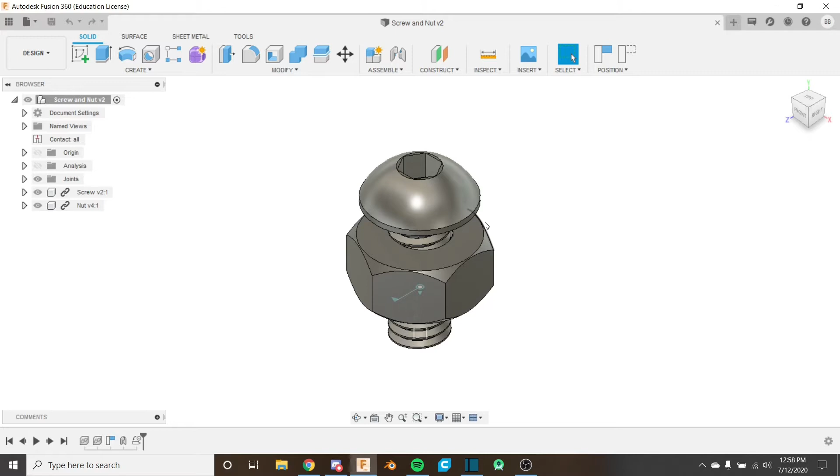So I want to create a table for our nut and our screw to sit on, because I don't want them floating in the air. So the first thing I'm going to do is align the screw and the nut properly. Right now it's just kind of balancing on its point here. This is the top, this is the bottom. So I want to turn it on its side and make one of these flat nut faces level with the ground.

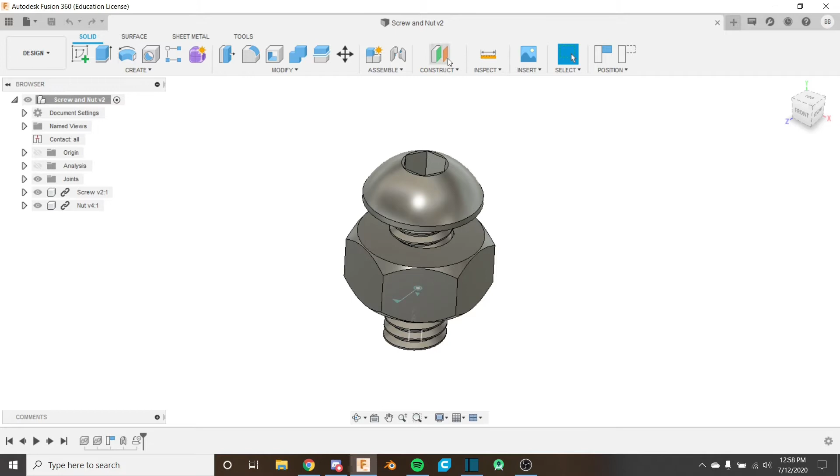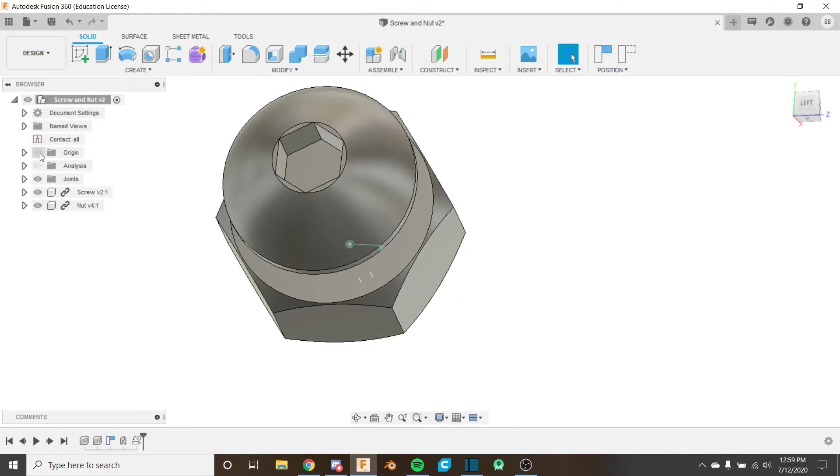So I'm going to do a move copy like this, and rotate it 90 degrees so it's sitting on its side. Then I'm going to look from here and rotate it until it's flat. And just like that, I think that's flat. We can double check by doing a measure between here and the origin plane like this, and we can see that the angle is 0 degrees.

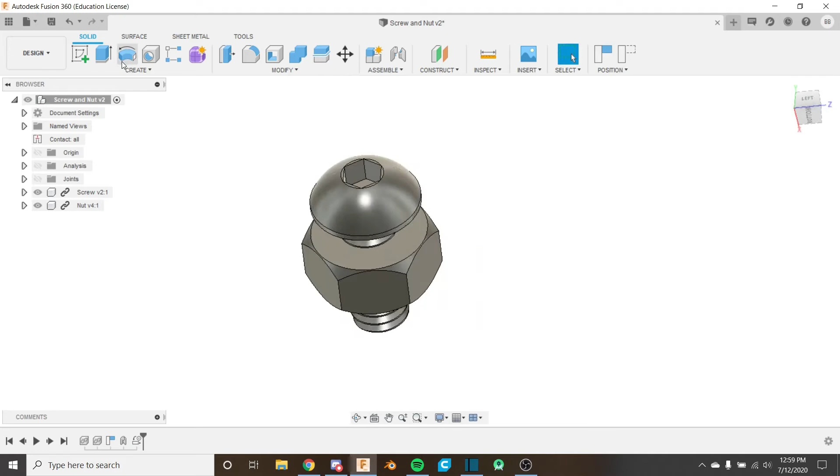So it's flat there. The next thing that I want to do is create the table for our screw and our nut to sit on. So I'm going to create a sketch on this bottom face here, capture position, and create a center rectangle for our table, just like this. It's going to be a pretty small table, but a table's a lot bigger than a screw. Something like that's fine.

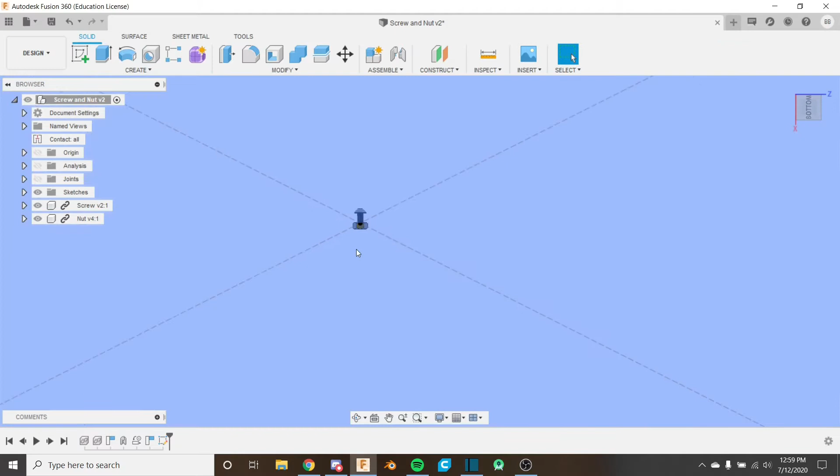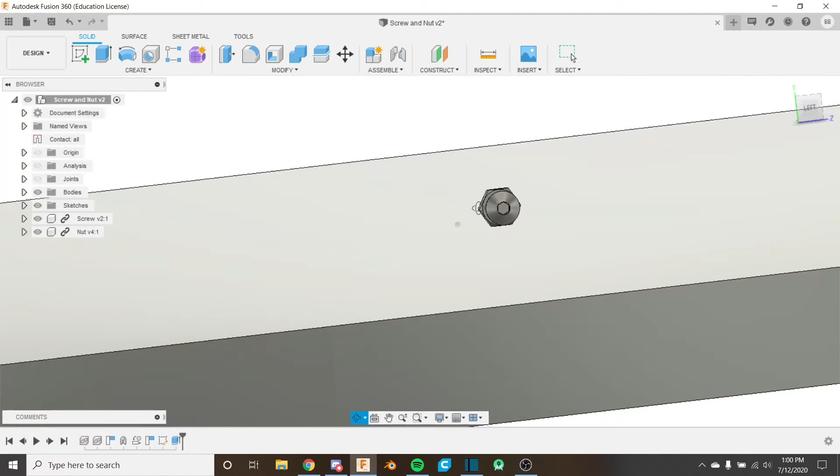And then I'm going to finish the sketch, hit E for extrude, select this, and make sure to select this face, otherwise it'll leave a hole. We're going to go ahead and bring it down 1 inch. Even though this document is in millimeters, I can put in 1 inch and it'll calculate that. And we have a new body. This is our table. So now we have some issues with this that we need to sort out.

First, the screw head is smaller than the size of the nut, so we need to figure out the angle where it's going to be resting. I think the screw head is heavy enough that it's going to make it rest at an angle.

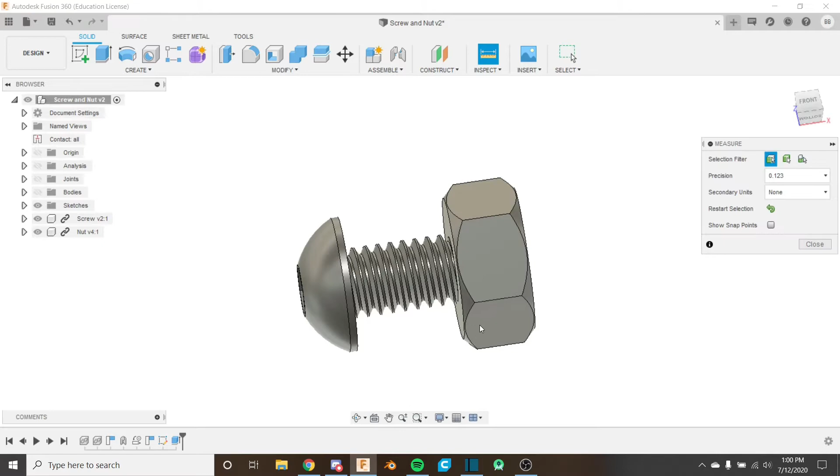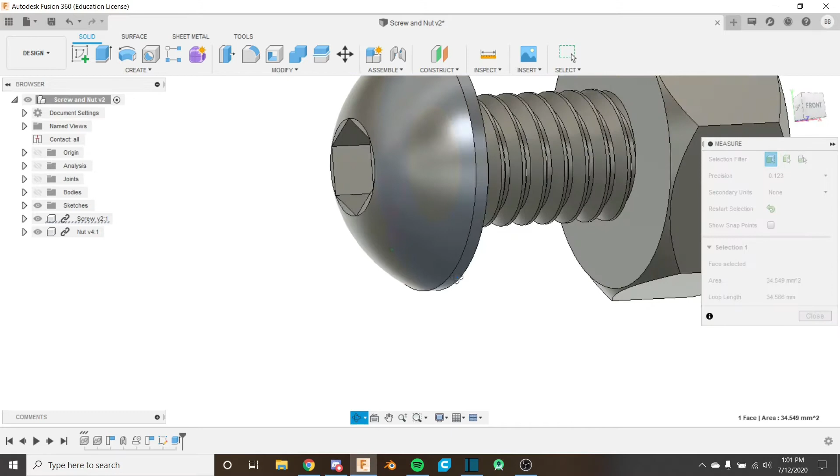So I'm going to calculate the height difference between the two by hiding our table and measuring from here to here. It tells us the distance is 0.245 millimeters. So I'm going to write that down, and we're just going to do some basic trigonometry with this. Then I need to know the distance between the faces, like this, and it says it's 6 millimeters.

So I'm going to use the inverse tangent trigonometry function to calculate this. If I do inverse tangent of 0.245 divided by 6, I get an angle of 2.34 degrees. This is going to be the angle that we need to rotate the screw.

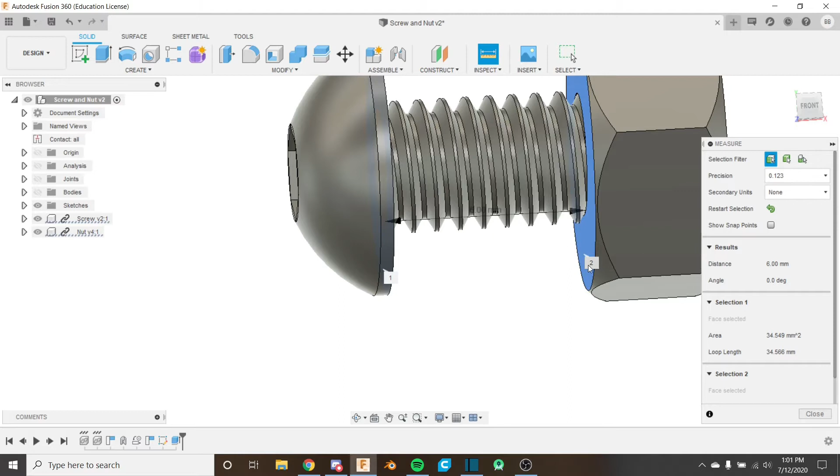Now, if I try to rotate it now, you'd notice it kind of stops me. I can't move it, and that's because we have contact sets turned on, and this is going to stop bodies from interfering with each other. So if I turn this off by clicking no contact, we'll bring it back later once we have everything in position.

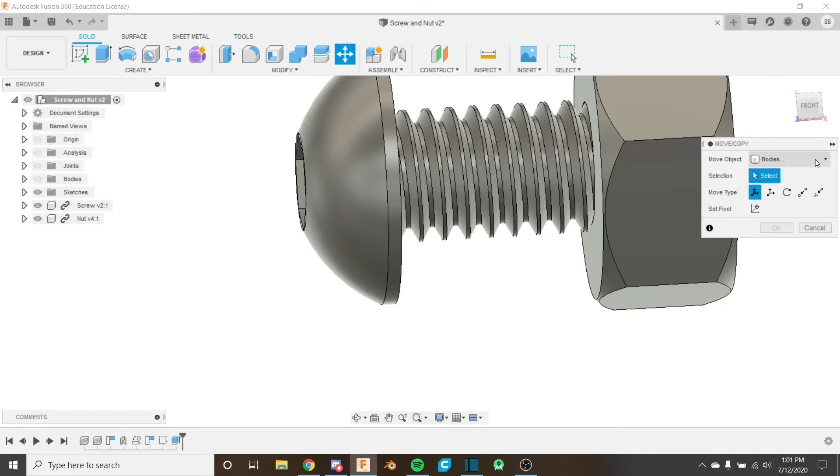Now it will let me move things, so they interfere. I'm going to go ahead and change this angle to our 2.34 calculated angle, just like that. Click OK, and now our screw is resting at the angle that we specified.

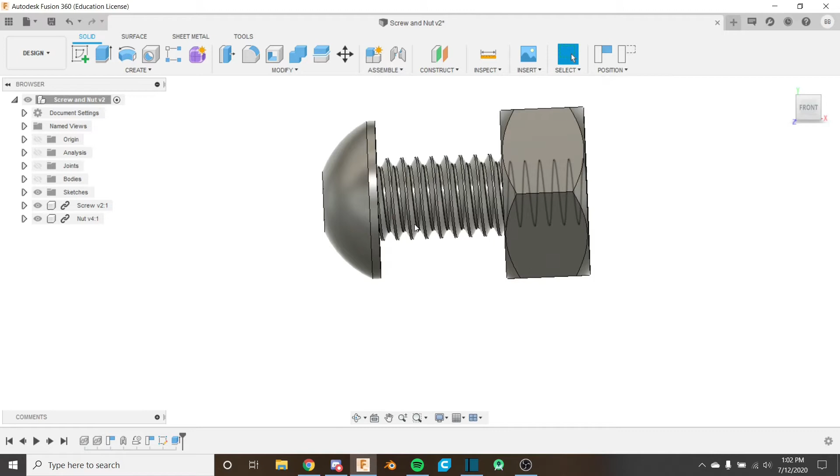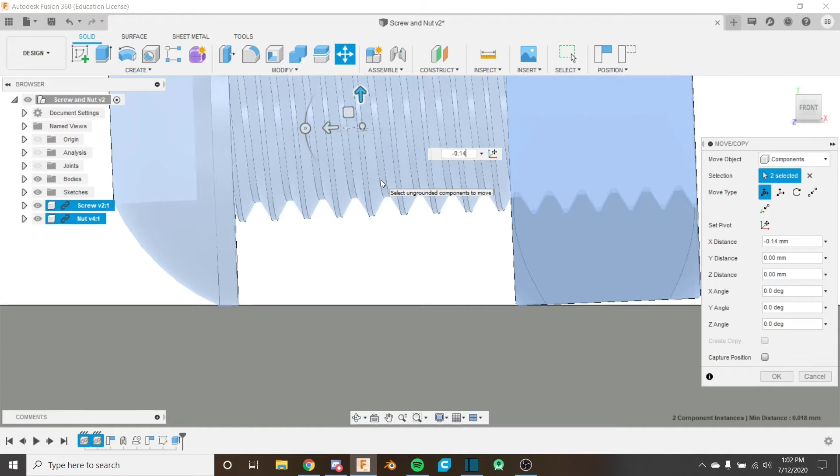So the next thing that we have to do is position it so it's level with the table. Right now we can see it's sort of floating above the table. This doesn't have to be perfect. I'm just going to bring it down a little bit until it's not floating anymore. It really doesn't have to be perfect. Maybe something like negative 0.14 is working for me.

That's pretty close. Just like that, we have our screw and our nut resting on the table realistically. Just like that is perfect.

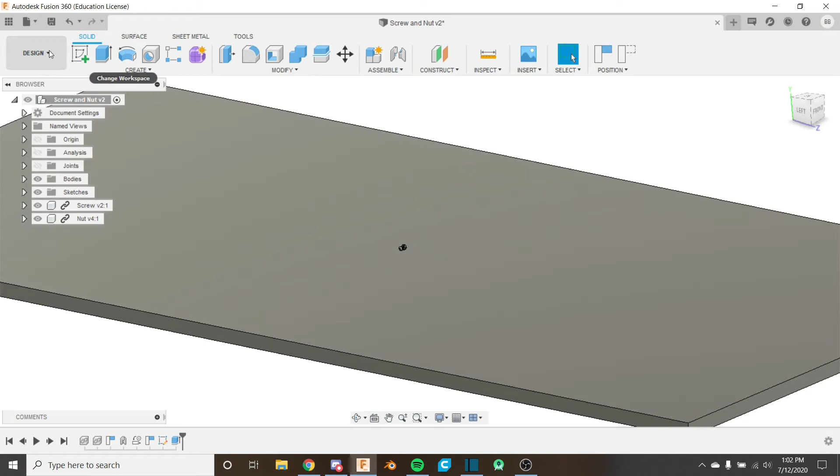So I'm going to go ahead and hop into the render workspace now, and now we can do our rendering settings. The first thing I want to do is apply some realistic materials to everything.

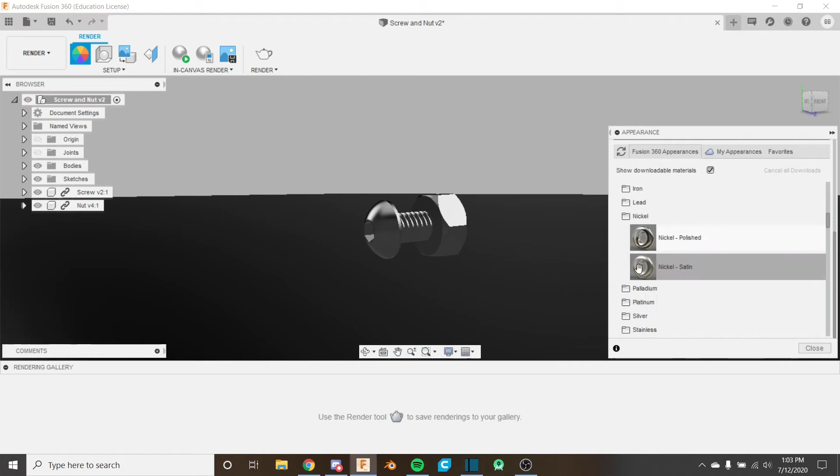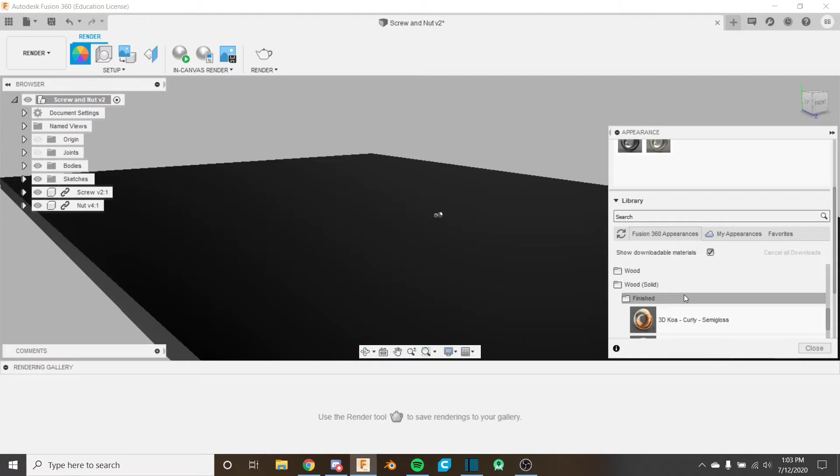It looks great. Now for our table, I think a wood table is what we want. I feel like most workshop tables are wood, so I'm going to choose sort of like an unfinished wood. Fusion 360 has some woods, but they're really all super perfect, so I'm just going to choose something that looks the best.

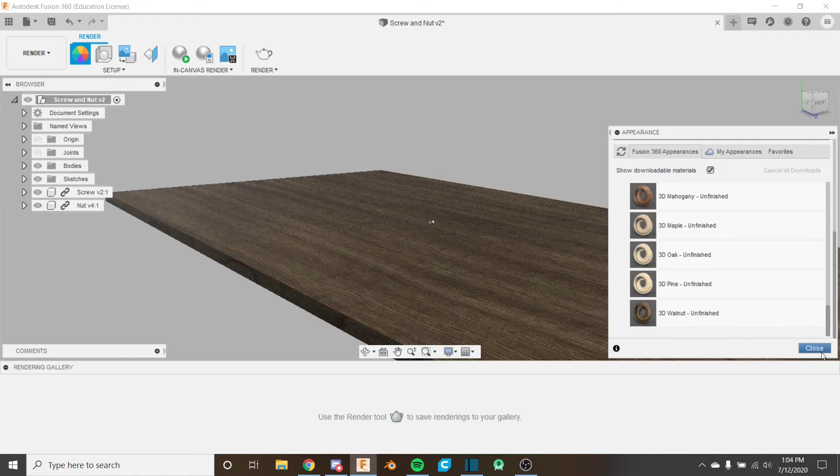Maybe mahogany, or maybe walnut. Yeah, I think walnut's good. I think I'm going to go with walnut. And we can zoom in and see how that looks.

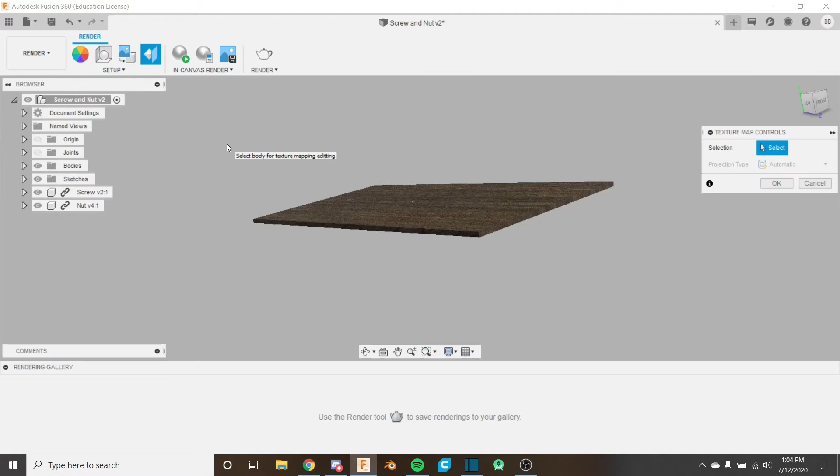Okay, so now we have our appearances set, but we can see that our wood grain is completely straight, completely squared away here. So what I'm going to do is go into the texture map controls.

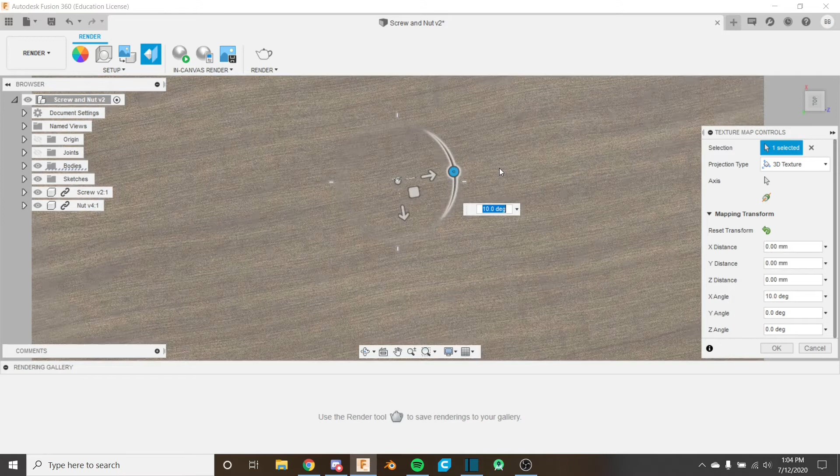I'm going to select our texture, which is our wood texture here, and I'm just going to maybe rotate it somewhat. I don't know, let's see. The thing is, on a table, the wood grain would probably be squared away on a rectangular table like this.

But when we're going to be rendering it, we're going to be zoomed in, and you're not going to really be able to see the end of the table. So I think it gives it a good effect if it's not squared away. I'm just going to do something like that, and we can just move this around until we get a wood grain that appeals to you.

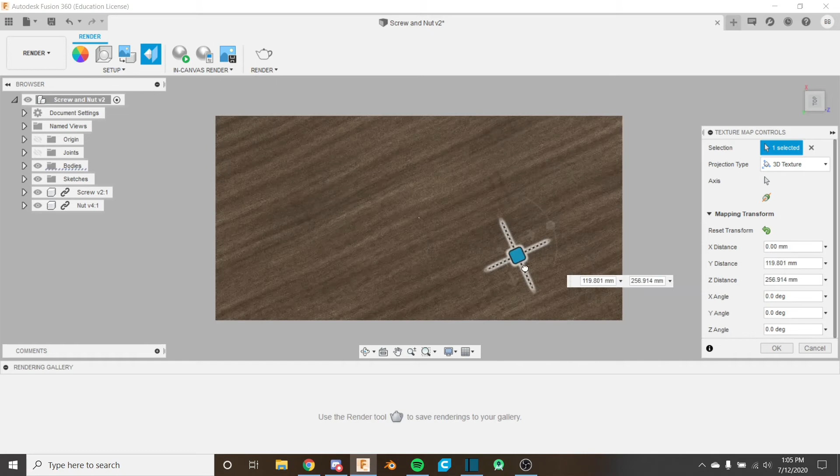I think I like it over here with the more darker sort of stuff. Just like that, I'm going to click OK. And now we have our wood texture completely set up.

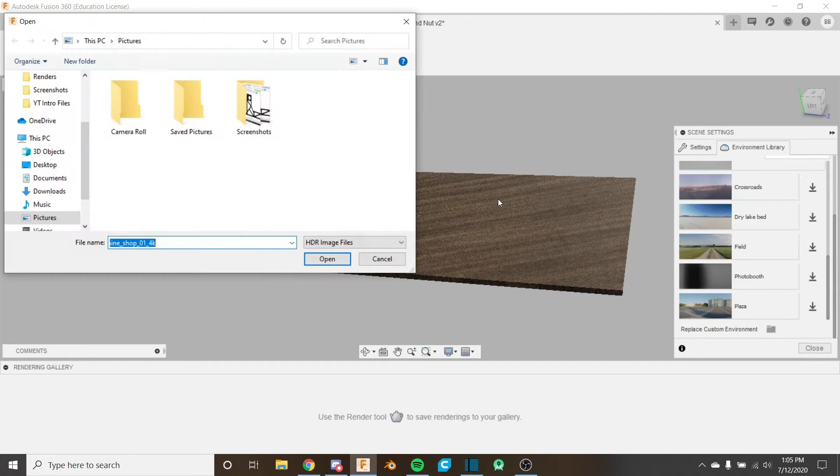The first thing I want to do is get an HDRI in here. I like that HDRI with the workshop, the machine shop HDRI. The aerodynamics workshop is really popular, a lot of people do renders in that one.

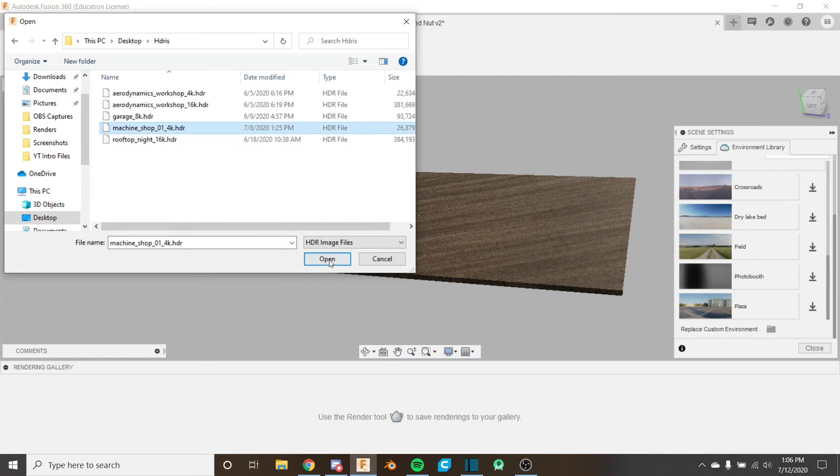And in the settings, I'm going to go ahead. Right now it's just gray. We're going to put this on environment so we can see the HDRI, just like that.

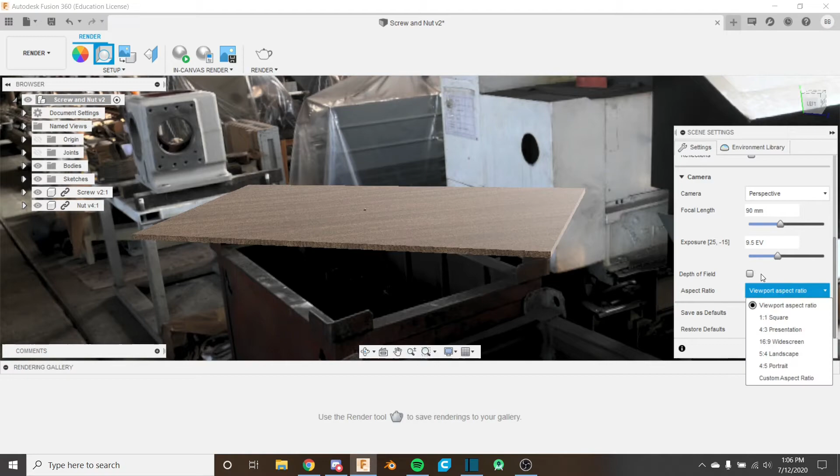Let's go through the settings. The first thing I want to do is change this to 16 by 9, so we know how much space we're working with, just like this.

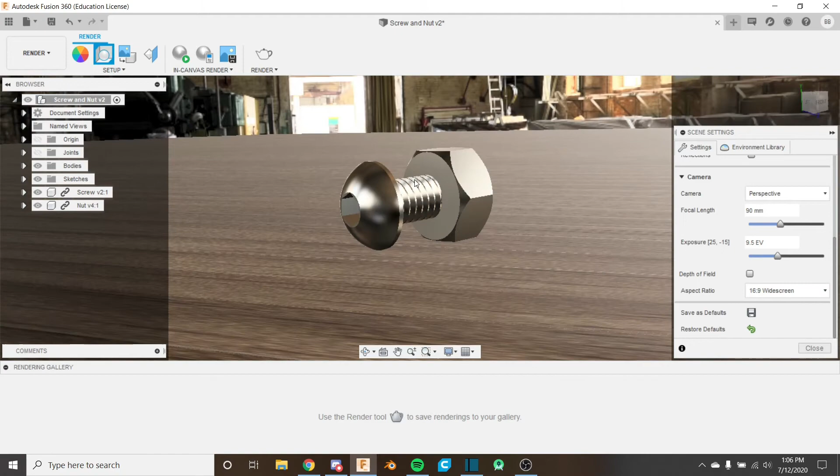And then I'm going to position my camera so we can get sort of like the look we're going for. I want it like a really low angle like this, where you can see the background really close to the screw. And remember that the camera doesn't have to be exactly flat, because that's not realistic. Maybe something like this is good.

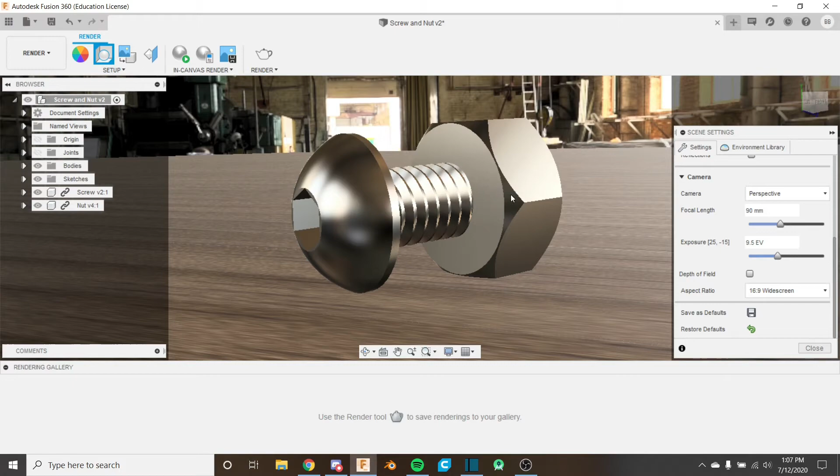And there, now we can change some things. So I want to actually save this view. If I go back to the design workspace and change some stuff, I want to always come back to this view. This is going to be my render view. How do I save this view?

In the named views section, we have the top, front, right, and home views. I want to create a new one, so I'm going to right click on named view, do new named view, and double click here so we can change the name to render. This is going to be our rendered view. So if I go away and then come back to the rendered view, it's going to be like that. Perfect. So we can look around at things and always come back to this view.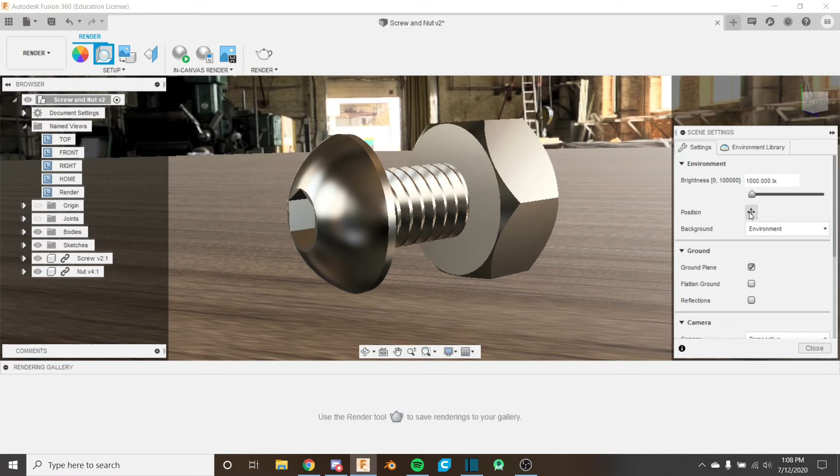Okay, so let's get into the settings here. The first thing I'm going to change is the position of the HDRI so we have the lighting how we want it. I'm just going to rotate it around, look at what's available and see which lighting I like. I want some nice reflections in the screw head, but I also don't want it to be too dark.

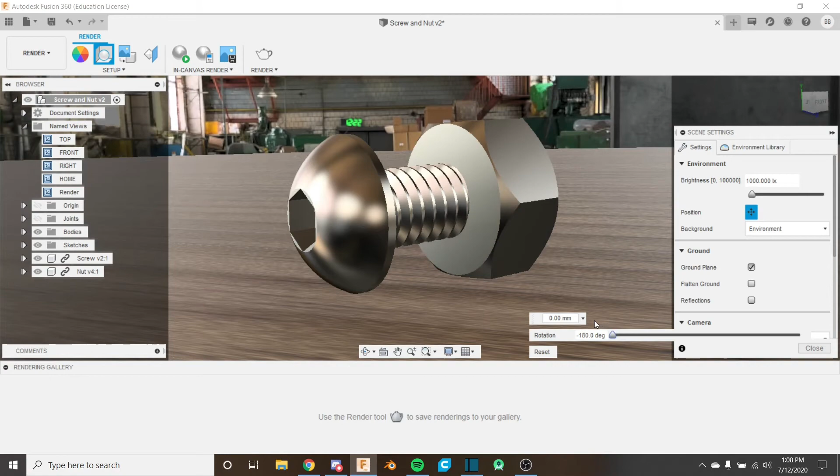So I'm thinking somewhere like maybe something like here would be good. It's pretty dark on this face, so maybe I want to rotate it until it's not so dark. Like there, we got some reflections. It's not too dark. That's going to be my position that I'm going to go with, 95.2 degrees.

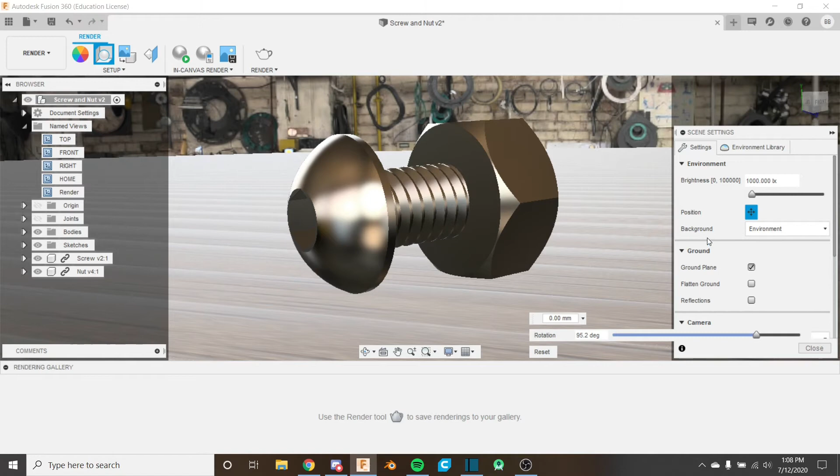The next thing I'm going to do is mess around with the focal length until we get it where we want it. So let's see what's good. I think I want to decrease the focal length a bit, maybe something like 86 or 80. It's a little bit too much. Maybe 80, 88, 87. I think 87 is perfect. So I'm going to go ahead and apply that.

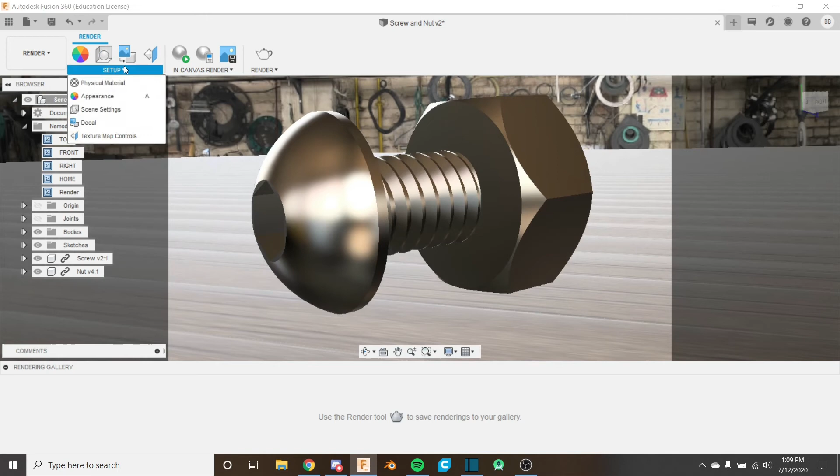And now I'm going to turn on our depth of field. I think that the focal point here is actually the nut. The screw is kind of off to the side a little bit, so I'm going to go ahead and put the focal point here. And I'm going to turn down the blur, and we're going to put this at 0.05. Let's say that should be good.

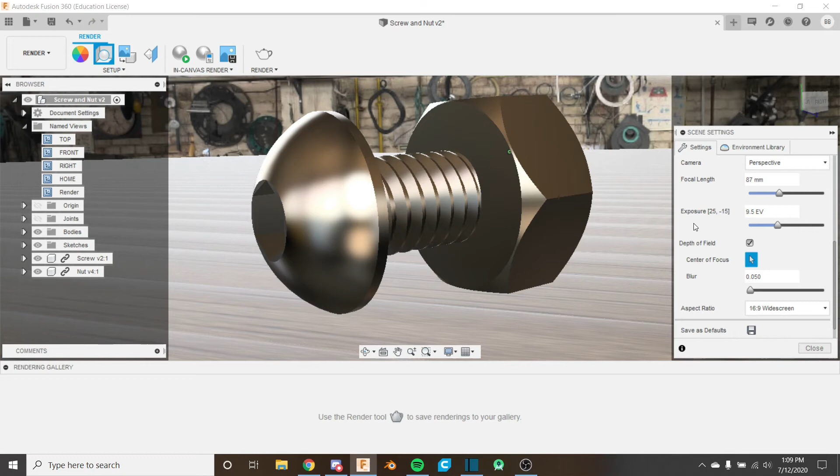Now, what other settings do we want to change here? We have our depth of field, our aspect ratio, our exposure. We can change in post.

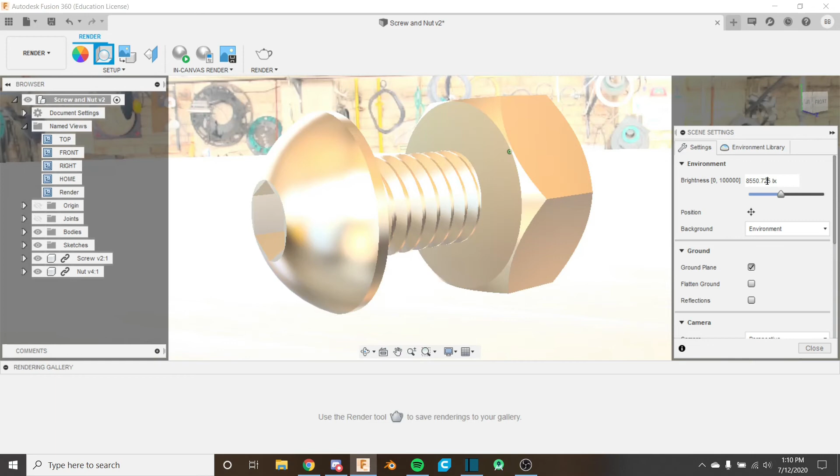So all I'm going to do here is mess around with the brightness a little bit and see if I want to turn it up or down. I think that it's at 1,000. It's a little bit too dark on these faces here and here. So I'm actually going to turn this up to maybe 1,200, maybe even a little higher, 1,300, and see what's too high. I think at 1,700 it's getting a little bit too high. So I'm going to go ahead and put this at 1,300, just like that, a little bit brighter.

And I'm not going to put any decals in. We already did our texture map controls, so I think it's time that we are going to render our screw and our nut. It's exciting.

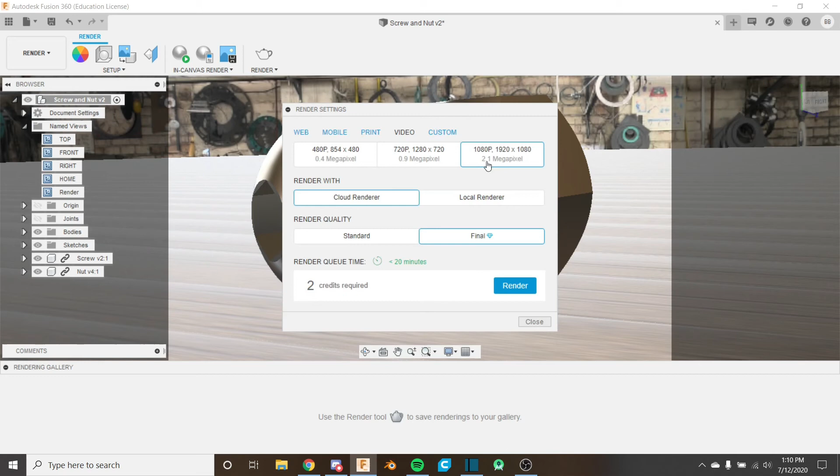So I'm going to use a cloud render, and this is just going to be sort of like a preliminary one, to make sure everything is correct on our render. I'm going to leave this at 1920 by 1080. If it's on custom, you can pick an image size here by choosing 1920 by 1080 or whatever you want it to be. So I'm going to hit render, and we'll be back when this is done and we'll take a look.

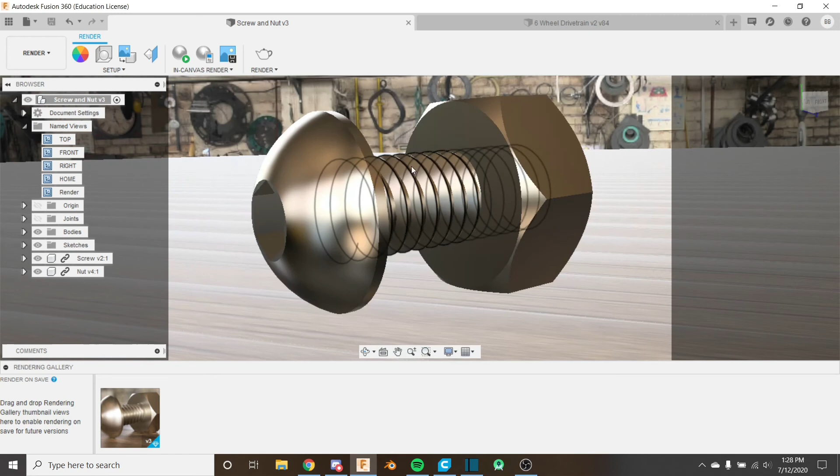Okay, our nut and screw has finished rendering. Let's take a look. As you can see, the depth of the blur is way too high. It's very blurry in the background like we wanted, but it's just too much. Even this screw is very out of focus. So what I'm going to do is go back into the settings here.

And I'm going to change this to maybe 0.01, bringing it down to a fifth of that. And then I'm going to go ahead and do a cloud render again, just like that, and we'll be back when this finishes to take a look.

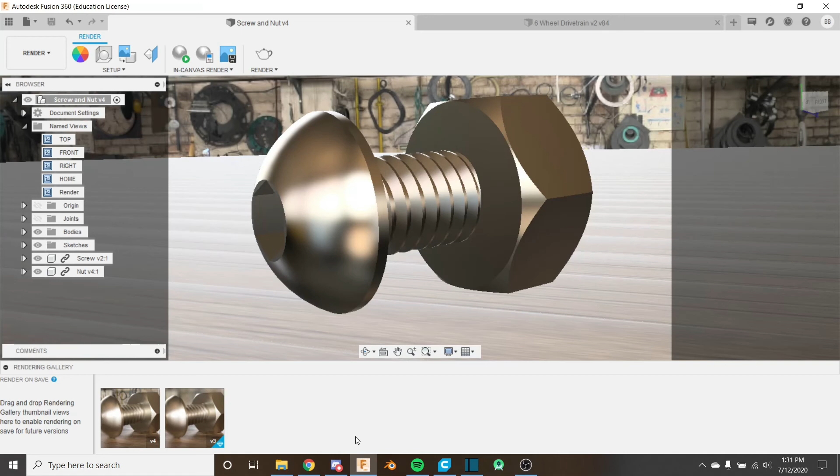Okay, now our revised screw and nut has finished rendering. Let's take a look. This is with the blur dropped to 0.01, and we can see this is much better. We probably could have gone a little bit more than 0.01, but I'm going to leave it at this. Our screw is in focus, our nut is in focus, and we've got a blurred out background.

And what helps is that I'm only using a 4K background, and since I use blur on everything, it's just going to be blurred out, and we don't need high quality. So that's looking great. The wood's looking pretty good. I'm liking this material on the screw and the nut. I'm going to call that finished.

Hopefully you have something that looks just as good as this, if not better. There's many ways to improve upon this. We could have done a lot of cool things, like adding an Allen key and then a nut driver in the background as if we just put this together, just for a little bit more realism. But I'm going to leave it for now.

Hopefully you learned something in this tutorial, and I'll see you in the next video where we are going to be taking a look at creating a blueprint for this screw and nut.